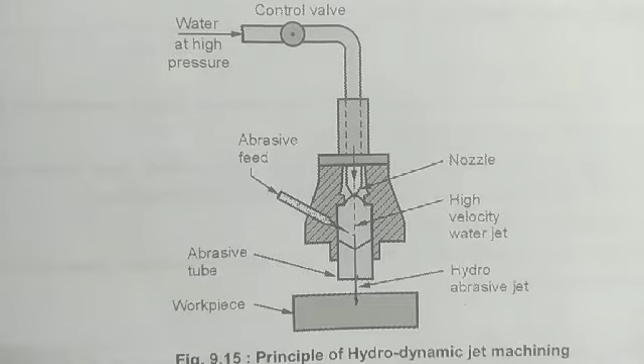The nozzle used in this process is of diameter 0.08 mm to 0.5 mm. The nozzle also carries a mixing chamber at its end.

The abrasive particles are mixed with the water jet coming out from the nozzle, and this mixture comes out from the chamber in the form of a high velocity abrasive jet which is directed on the workpiece, and due to this material is removed with the combined effect of abrasion and impact.

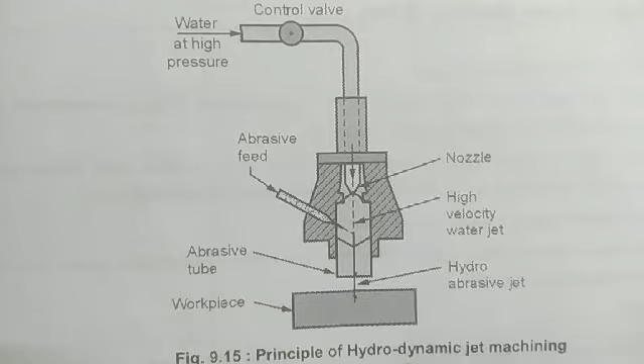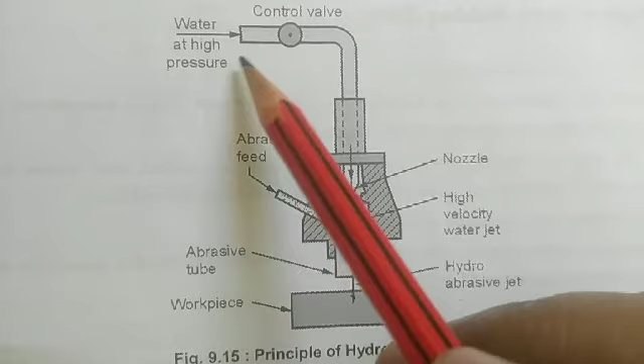So we can see the setup of this hydrodynamic jet machining or abrasive water jet machining process. In this, the water is supplied at a very high pressure from the accumulator, and through a control valve it is supplied to the nozzle. Now in the nozzle there is an abrasive feed mechanism.

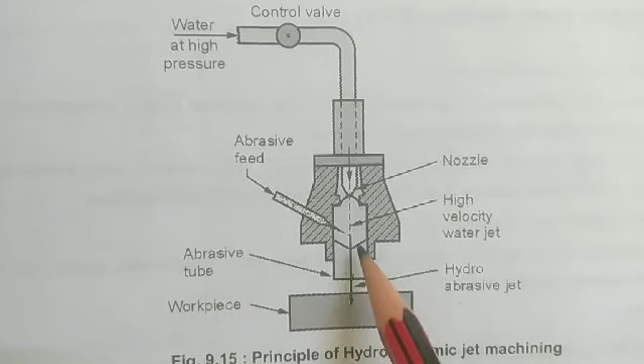From the nozzle the high velocity water jet comes, and on its way the abrasive particles are mixed in it. In the abrasive tube the mixture of abrasive particle and water jet is made, and this mixture is made to impinge on the workpiece surface with a very high velocity, and therefore metal is removed from the workpiece by a combined effect of abrasion and impact, and this method is used to cut any material.

In this process the workpiece should be larger than the diameter of the jet which is coming out of the nozzle, and the water pressure used in this hydrodynamic water jet machining varies from 2100 bar to 3500 bar, which is very high pressure, and because of this the problem of sealing of the joint arises.

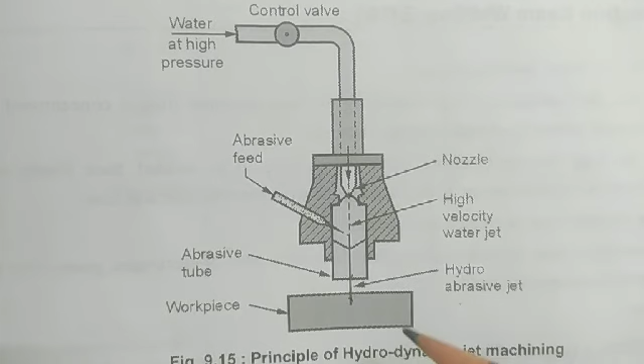The abrasive particles used in this process are generally aluminum oxide, silicon carbide or garnet, and their grit size varies from 6 to 120. The mixing chamber is made of hard and wear resistant material like carbide, and a gap of 0.5 to 1.5 mm is maintained between the workpiece tip and the tip of the tube.

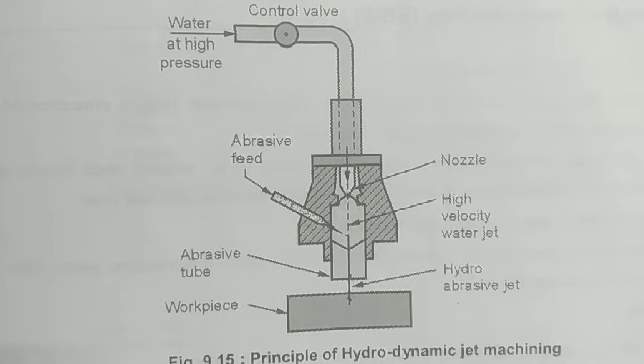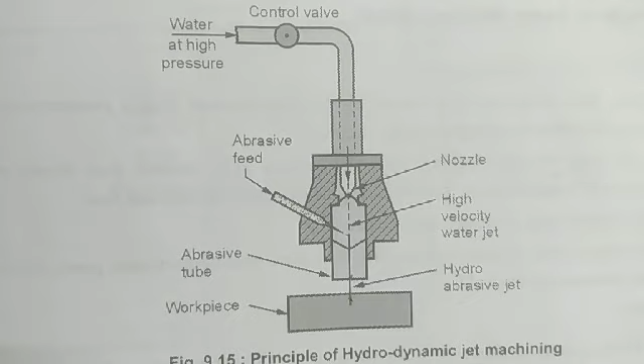The advantages of hydrodynamic jet machining are that it is a cheap process and any contour can be cut by this process. This method doesn't generate any heat and requires less maintenance, and it is best suitable for explosive environments.